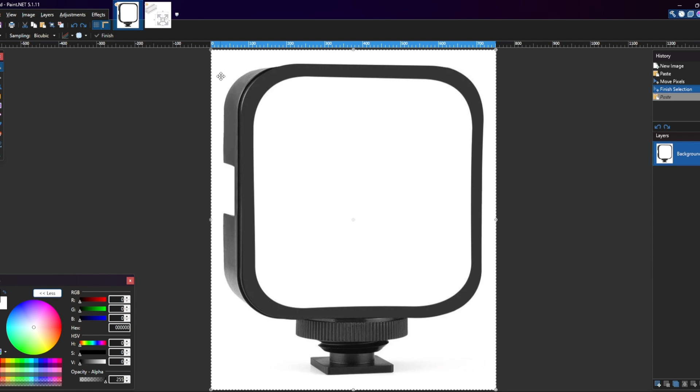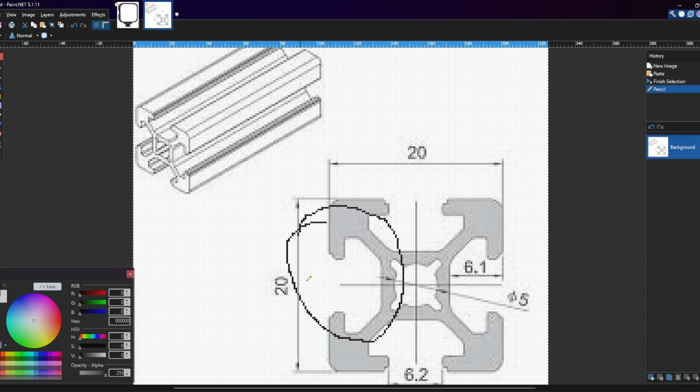This light has a small skirt on bottom, and the 3D printer has an aluminum profile on top of it with 20 by 20 size. So my plan is to make a mount with a slot for the skirt of the light.

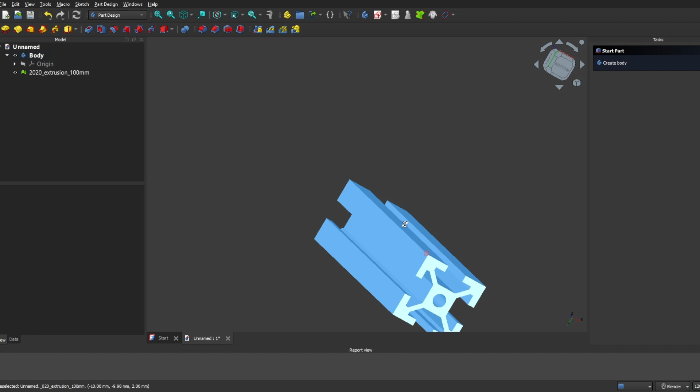Let's start with the model. The first thing I need to do is import an aluminum frame, and I found this model on the internet, and it perfectly fits for my goal.

To actually be able to use this model, I need to create a shape from it. So I'm going to switch to part mode, select the object, and go to part menu and create shape from mesh.

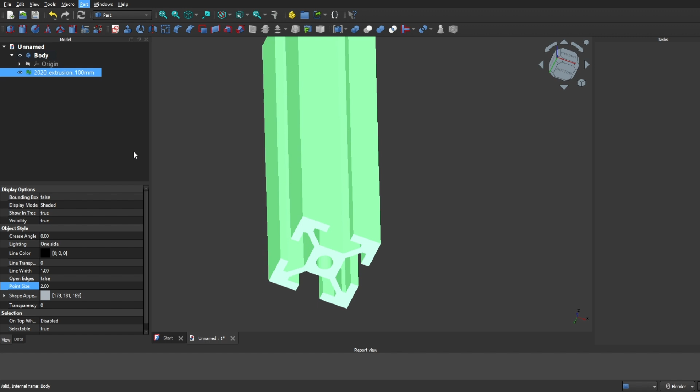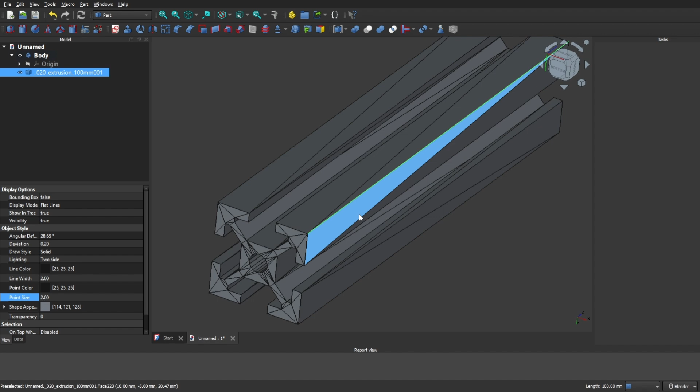Now I can delete the original model, and I have a model which I can use for reference. I can reference edges, sides, all points.

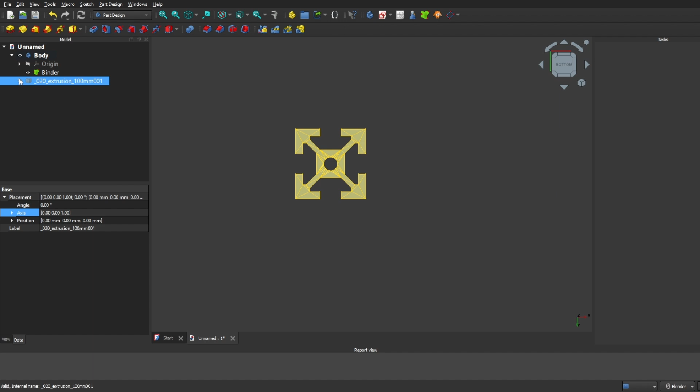Now when I'm back to part design, I need to create a sub shape binder to be able to reference it inside sketch, and I can hide the model and create a sketch on the XY plane.

I need to repeat this shape since I want to slide in this mount. Now I'll just repeat this shape.

Now when I'm done, I need to use the external geometry tool and mark edges, which I'm going to use as a reference for constraints.

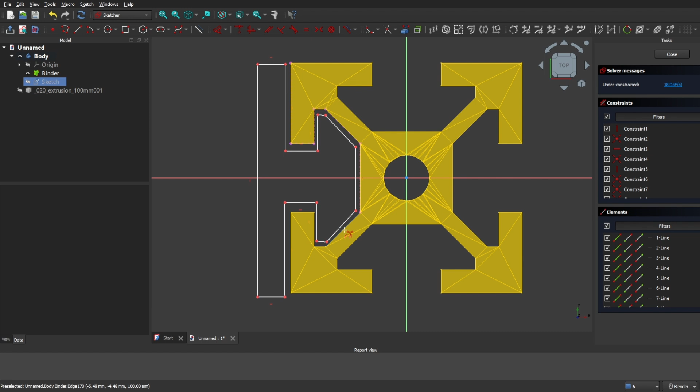Now I can hide the binder and use the dimension tool to add some 0.2 spacing.

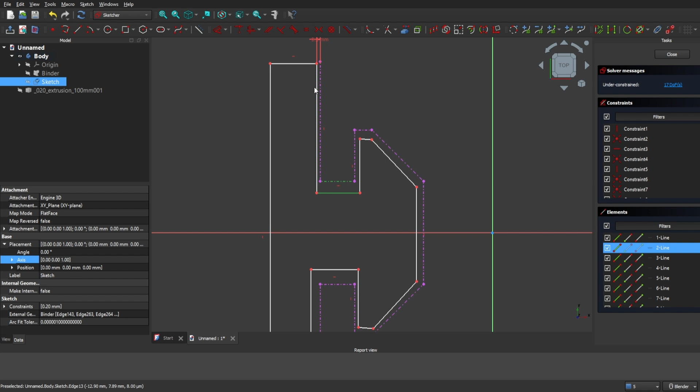This line should be constrained horizontally. Same for this one. And spacing for a few other lines.

These 2 points should be aligned vertically, same as these lines. These two should be parallel. These two should be parallel, same, and same for this.

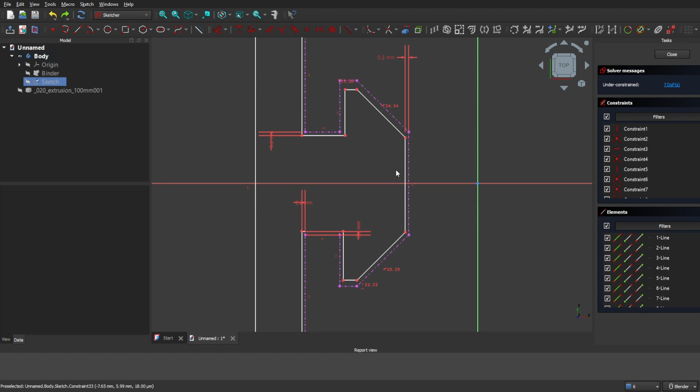It's better to make these two equal in length and a small gap here.

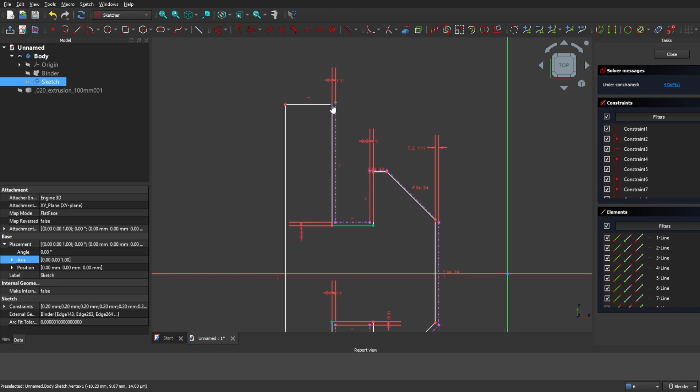These 2 points also need to be aligned, but horizontally, same as this. And as final part, make these 2 points horizontally aligned.

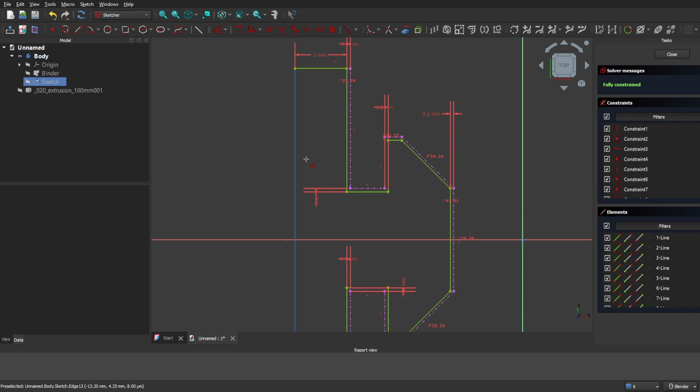And this part is done. Now I need to make this part 3 mm thick, and the shape is done.

Now I can use pad and make it about 25 mm deep.

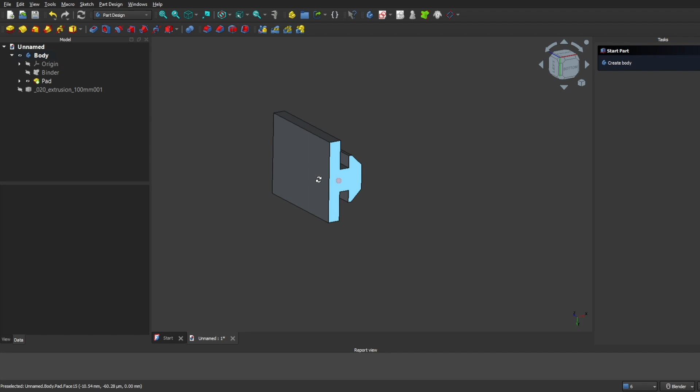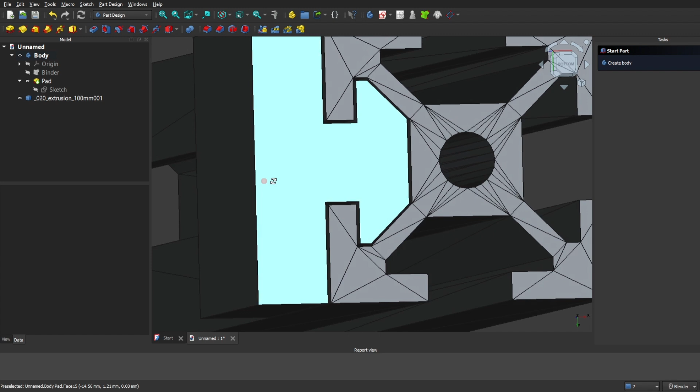As you can see, the model perfectly repeats the shape with a small gap, and the last step is to add a slot for the light skirt. So I am going to start with a sketch here.

So for the skirt, I'm going to create external geometry here and start drawing the shape like this.

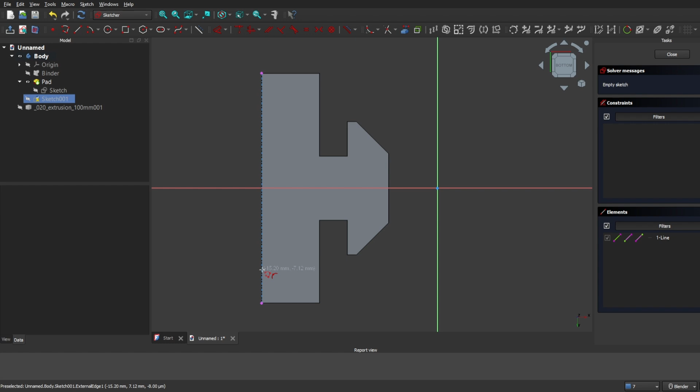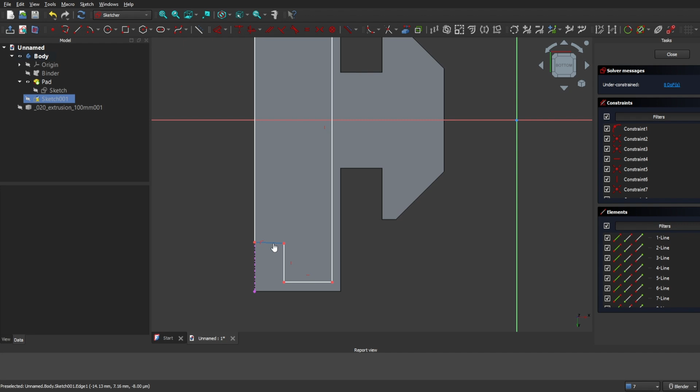This constraint here is redundant, so I should remove it. This should be horizontal and this vertical, same as this.

The skirt is 18.2 millimeters wide and 2.2 millimeters thick. And the gap should be a depth of 1 millimeter.

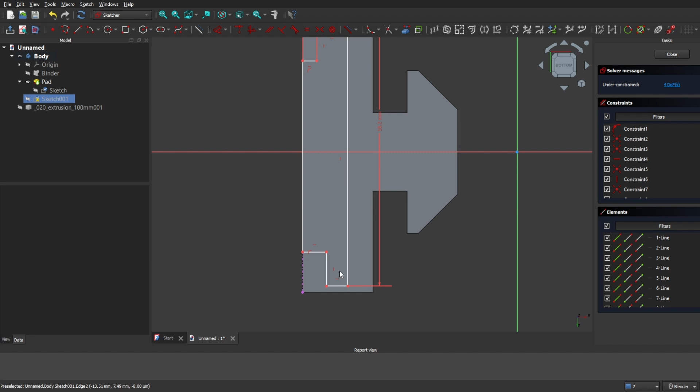The size is 0.4 millimeters. And I can make this equal.

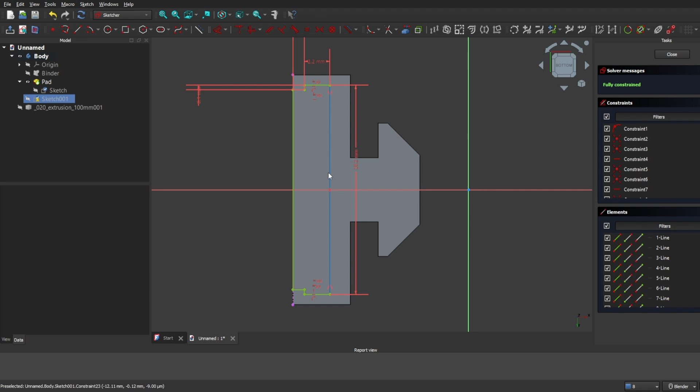And these two lines should also be equal, symmetric to the origin. Remove redundant, and the slot for the light skirt is done.

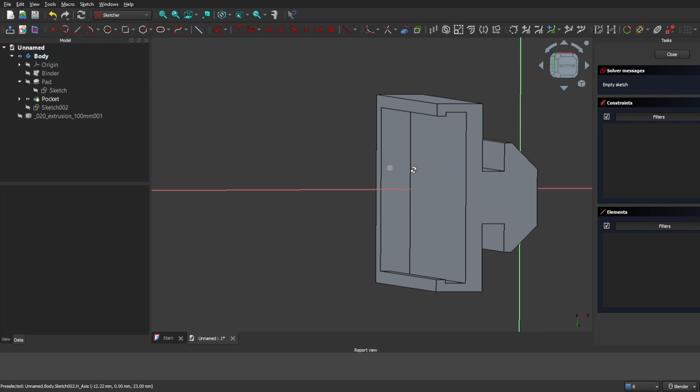And I can carve a 23 millimeter slot and add a small side to finish it.

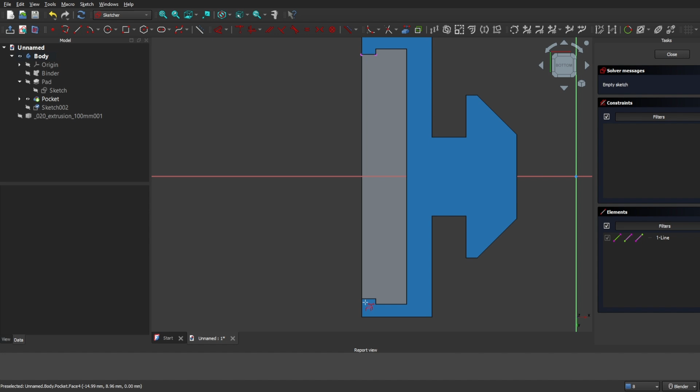I need to mark these two lines and draw a rectangle, close it. Now I can use pad

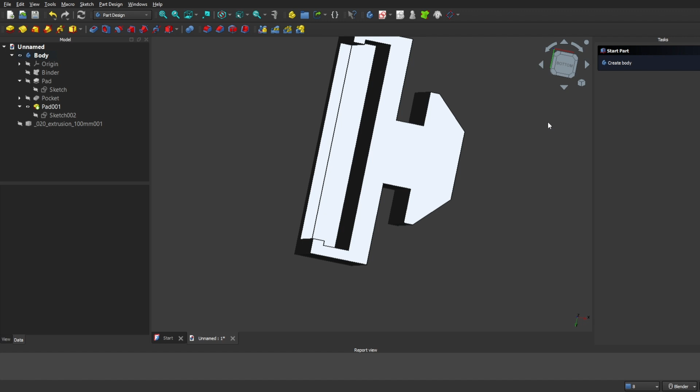with 2.2 millimeters length. Now it's done, and I have a mount for the camera light, which slides into the V slot on my 3D printer.